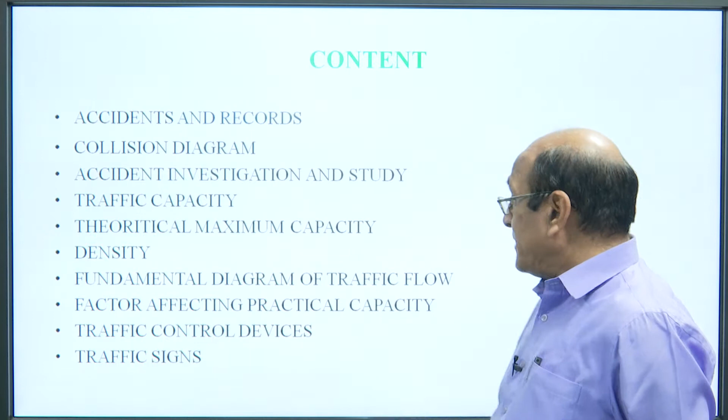Today's contents are accident and records, collision diagram, accident investigation and study, traffic capacity, theoretical maximum capacity, density, fundamental diagram of traffic flow, factors affecting practical capacity, traffic control devices, traffic signs.

In accident and records, collection of accident data is essential, in which first of all general data are collected. What is the date, what is the month, what is the weather in which the accident occurred. Next is location, what is the location of the area where the accident occurred.

Details of the vehicle involved, the vehicle which was involved in the accident, the details of which make, type of vehicles, this has to be collected. Nature of accident, whether it is a major accident, minor accident, or some fatality has occurred, or it is just injury.

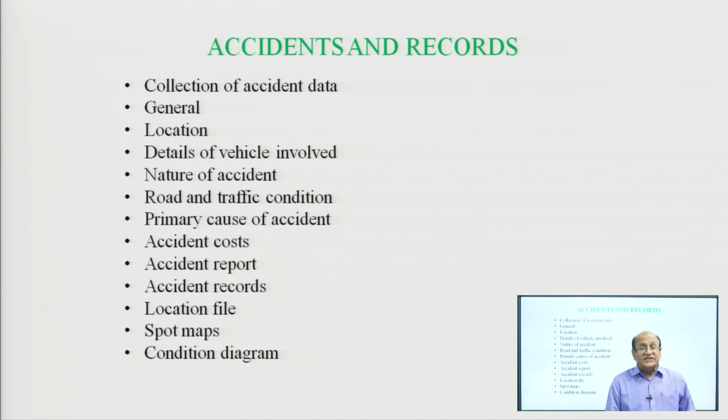Road and traffic conditions. Road conditions are also recorded. What are the road conditions, the riding quality, whether riding quality is okay or not. The traffic condition, whether the traffic is mixed traffic, channelized traffic, unchannelized traffic. Next is primary cause of accident. In the first instance, what is the cause of the accident.

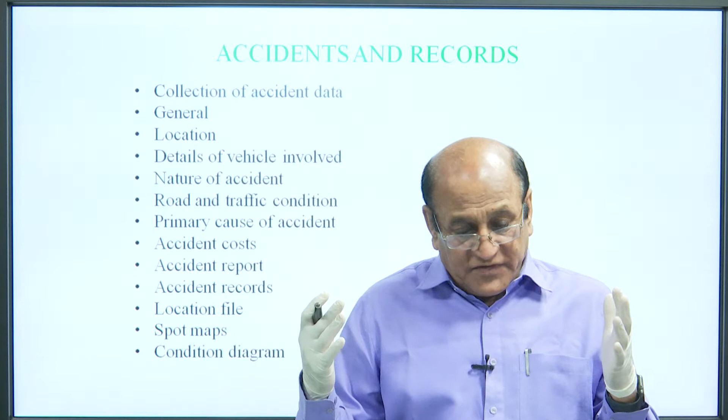Accident cost, what is the loss of property in this accident, this should be also counted. Accident report, the competent authority for the accident is police personnel. They have to work under the legal offence, so they should be informed. Accident records, these have to be collected by the civil personnel as well as the police personnel.

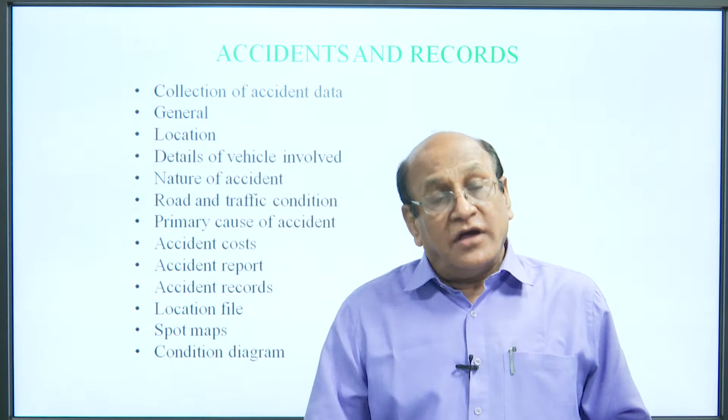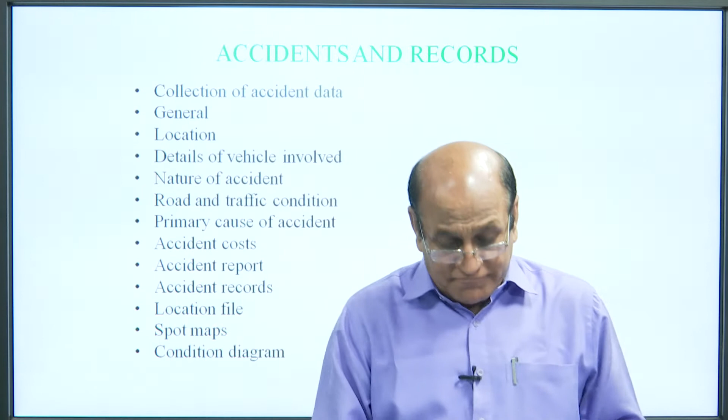Location file, what is the location of the accident? This should be mentioned in a file in a proper way. A spot map, that is called Nazri Naksha. This should be recorded into the record book. Condition diagram, what are the conditions of that day, that time of accident, that should be recorded.

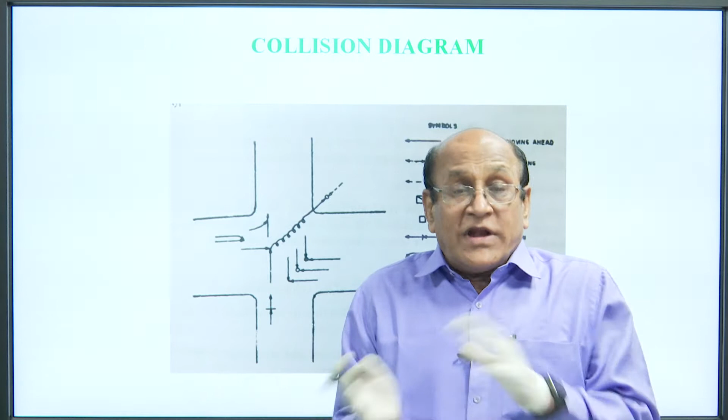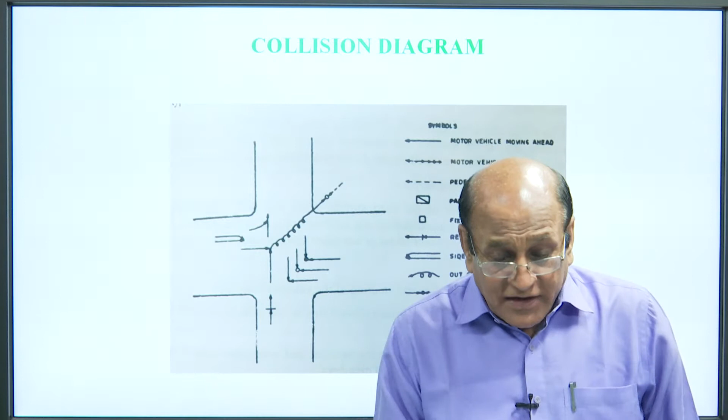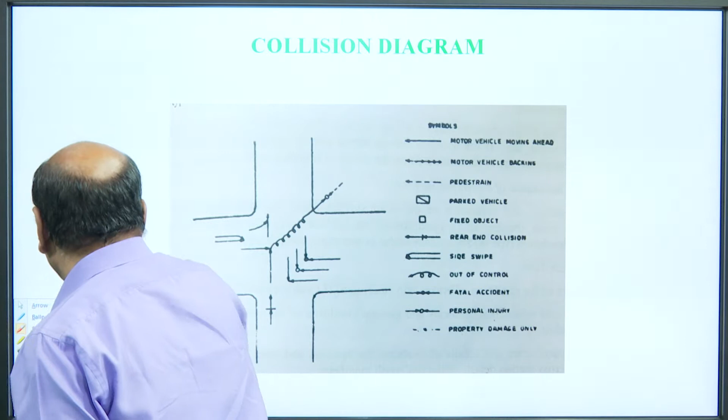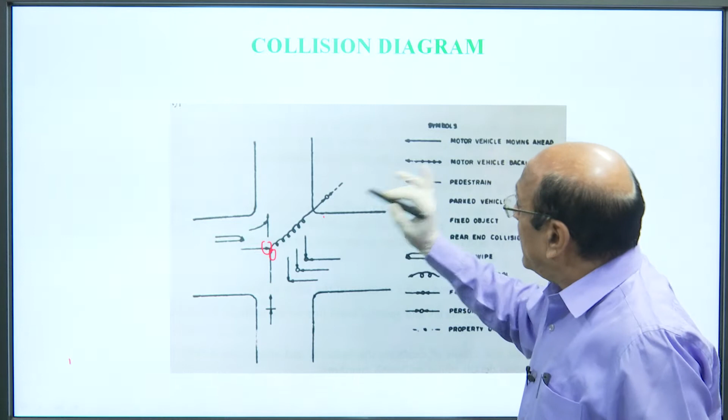This is the collision diagram, means when the vehicle and a pedestrian collide with each other, what is the position of the vehicle, what is the position of the pedestrian. This should be mentioned in a diagram. Suppose this is the vehicle and this fellow is a pedestrian. Both vehicle and the pedestrian have collided at this spot. So, this should be represented in the diagram.

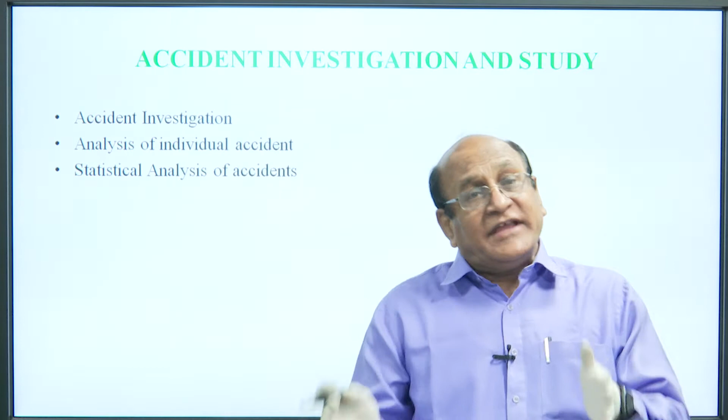Accident investigation and study. This has to be carried out after the accident. Accident investigation could be carried out by the police personnel, tests could be carried out on the vehicles, the persons and more, and each individual accident is analyzed so that it could be compared with other accidents, whether the point of accident is causing accidents or something else. A statistical analysis of accidents should be kept in traffic engineering for future works.

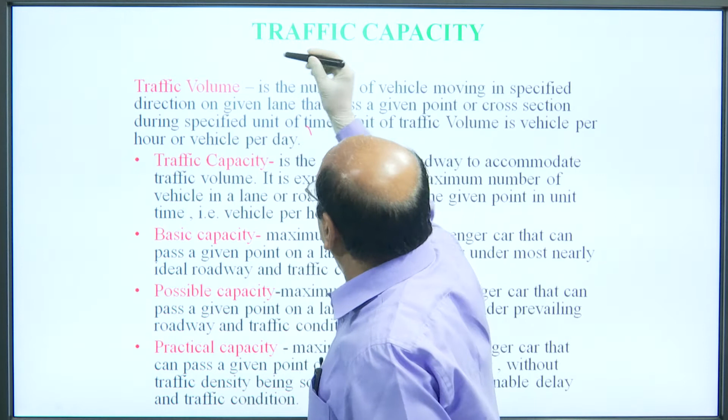Now, come to traffic volume, traffic capacity. First of all, in traffic capacity, the word coming is traffic volume. Traffic volume is the number of vehicles moving in a specified direction on a given lane that pass a given point or cross section during a specified time. Unit of traffic volume is vehicles per hour or vehicles per day. So, this is the traffic volume.

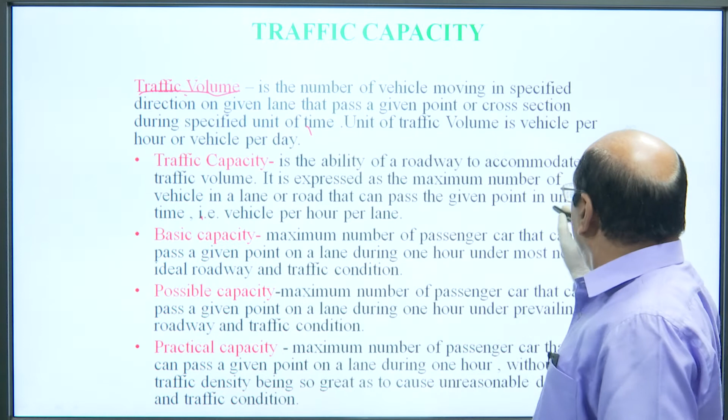Now, traffic capacity. Traffic capacity is defined as the ability of a roadway to accommodate traffic volume. It is expressed as the maximum number of vehicles in a lane or road that can pass the given point in a unit time. That is vehicles per hour per lane.

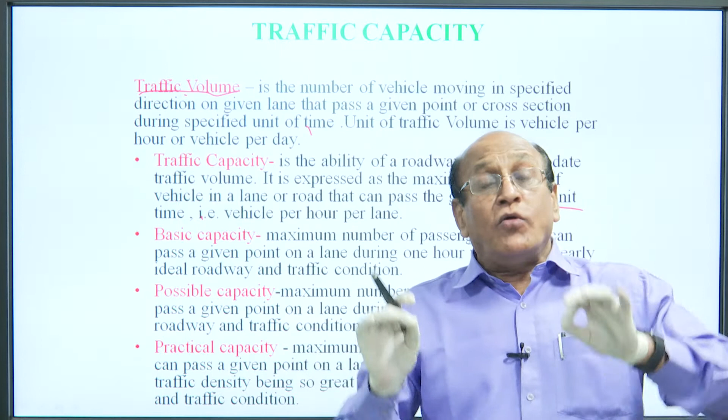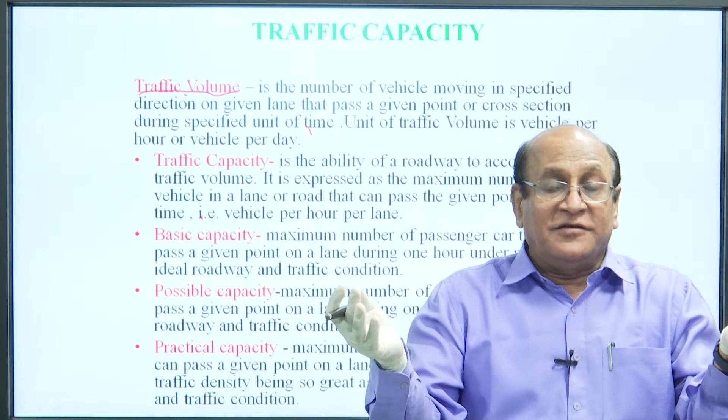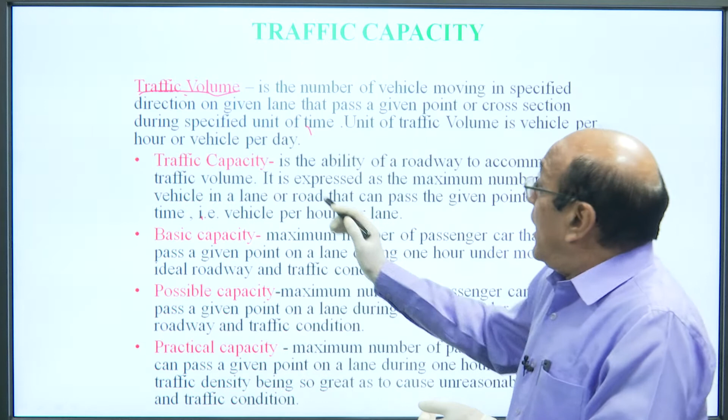See here, traffic volume is the number of vehicles passing through a point or cross section, and the traffic capacity is the maximum number, means after that the road has no capacity to accommodate any further traffic. This traffic volume may be lower than the traffic capacity.

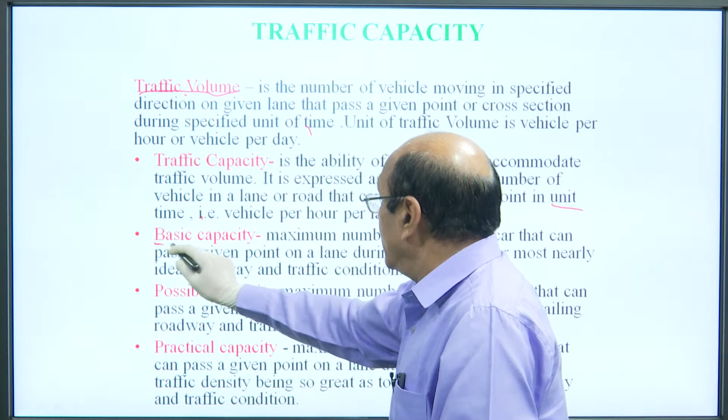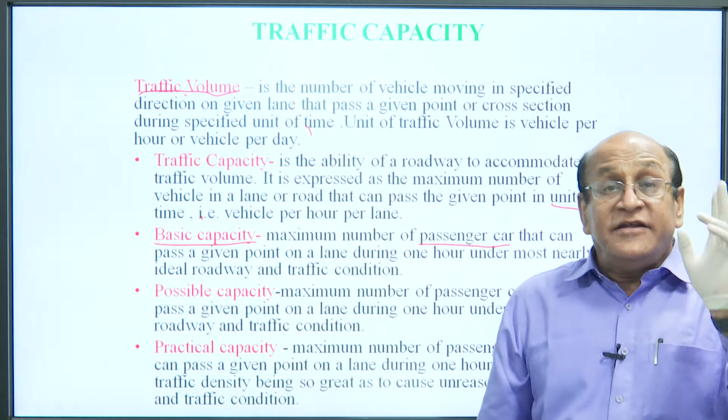Now, come to the basic capacity. Basic capacity, the maximum number of passenger cars. See here, here it is not written vehicle, here passenger car. The maximum number of passenger cars that can pass a given point on a lane during 1 hour under the most nearly ideal roadway and traffic conditions. So, the basic capacity is the ideal capacity of a highway.

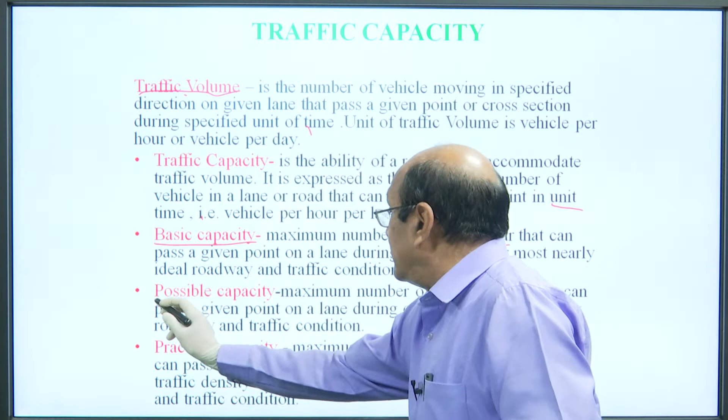Possible capacity, the maximum number of passenger cars that can pass a given point on a lane during 1 hour under the prevailing roadway and traffic conditions. So, this is the possible capacity.

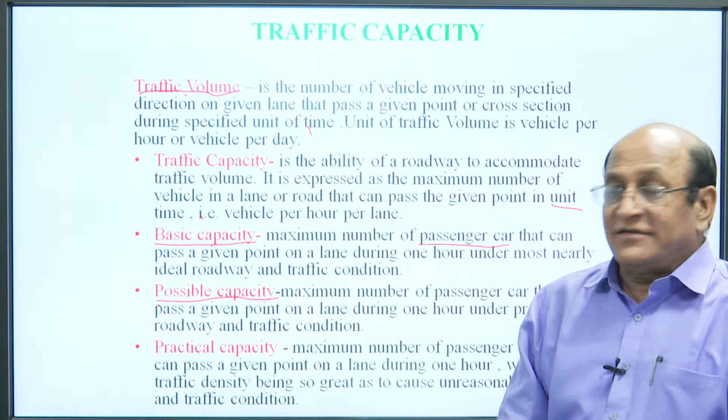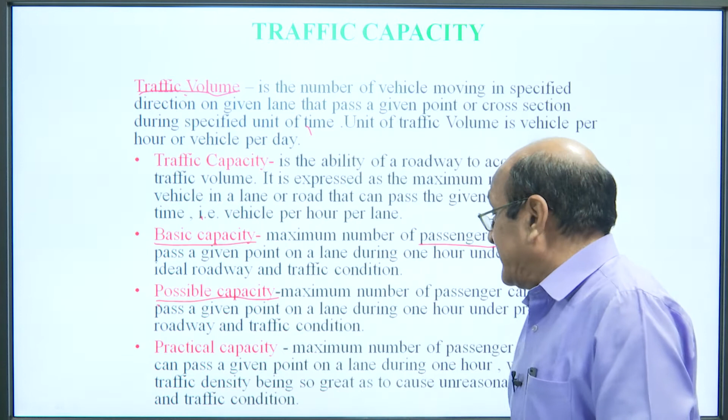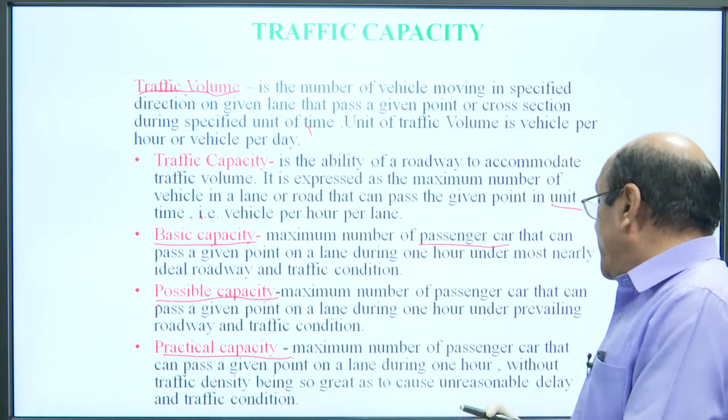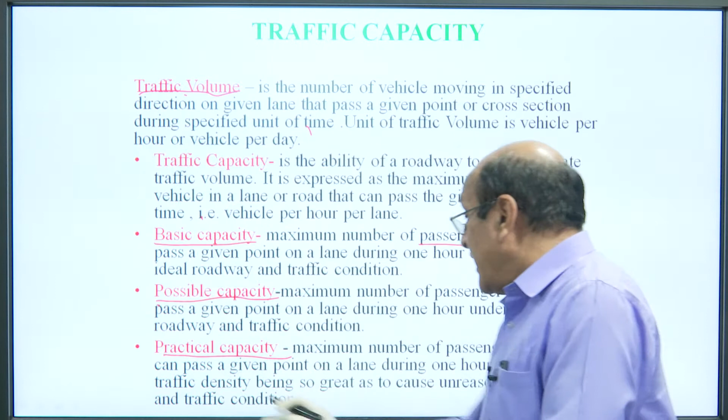Here you see, this is the possible capacity. Now, practical capacity: the maximum number of passenger cars that can pass a given point on a lane during 1 hour without traffic density being so great as to cause unreasonable delay and traffic conditions. So, these are the basic parameters as far as traffic capacity is concerned.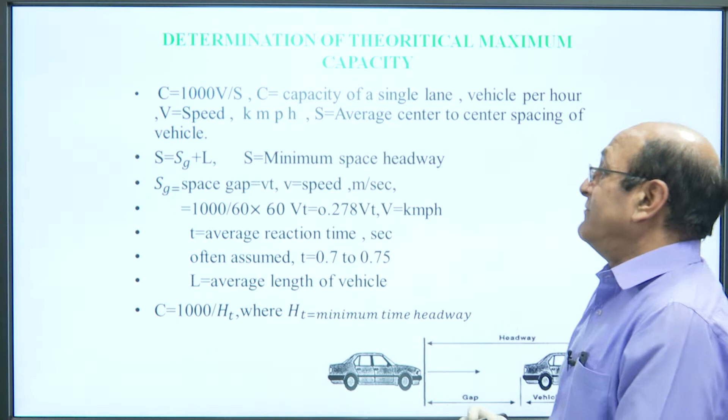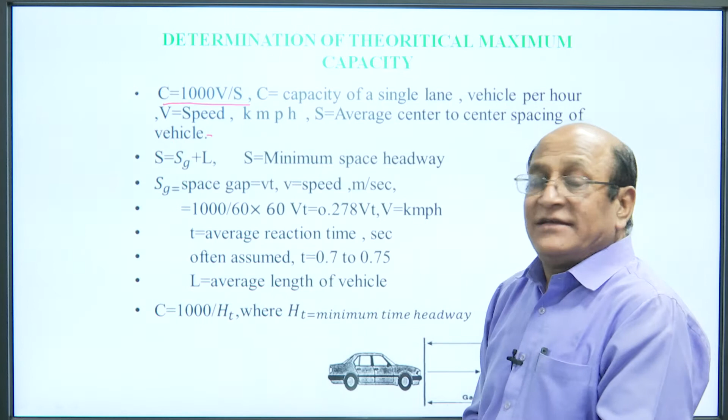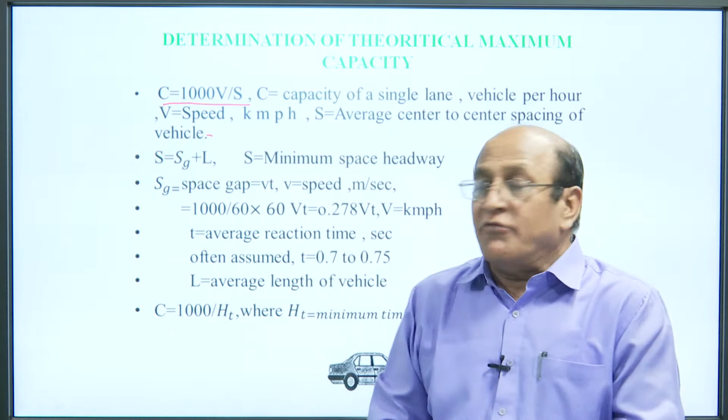Now, come to determination of the theoretical maximum capacity. That could be found out by C = 1000V/S, where C is the capacity of a single lane in vehicles per hour, V is the speed in kilometers per hour, and S is the average center to center spacing of the vehicles.

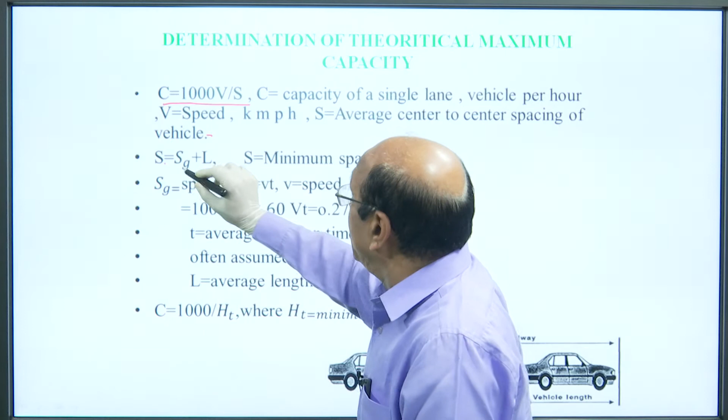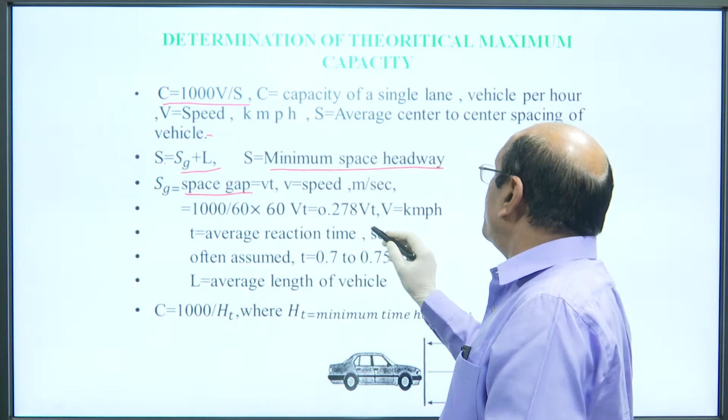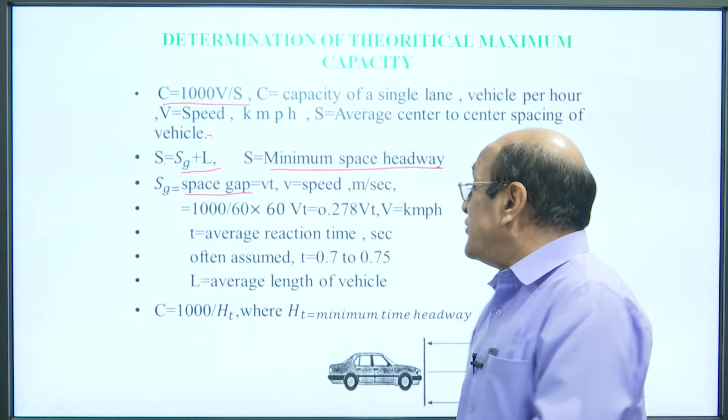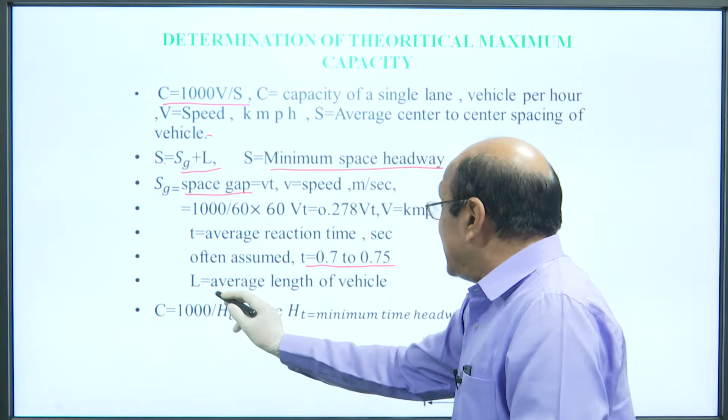So, here S = Sg + L. S is the minimum space headway, Sg is the space gap, and that is Vt. V is the speed in meters per second, means speed of the vehicle. So, this could be written as 1000 divided by 60 into 60 Vt. So, it will be 0.278 Vt, where V is in kilometers per hour. t is the average reaction time in seconds. Often it is assumed to be t between 0.7 to 0.75, depending on the age group of the person. L is the average length of the vehicle.

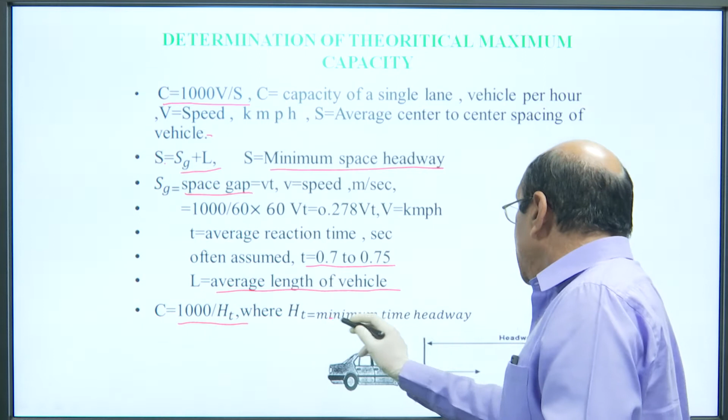So, C will be 1000/Ht, where Ht is the minimum time headway; here there was a space headway. So, see here, this is one vehicle, ahead this is another vehicle, this is the length of the vehicle, and between these two vehicles there is a gap, and this gap is Sg. So, S will be equal to Sg + L. L is the length of the vehicle.

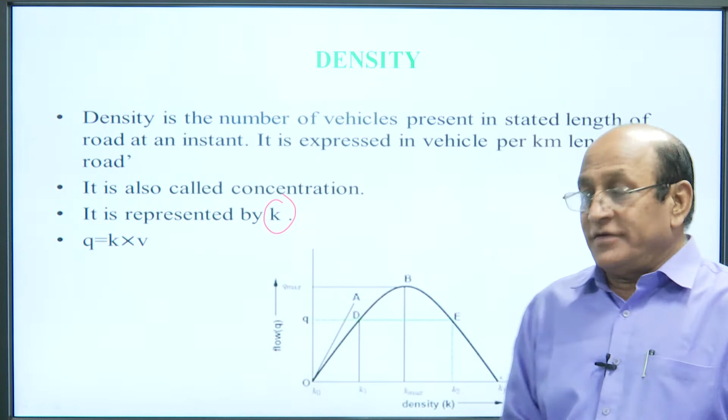Now, density. Density is the number of vehicles present in a stated length of road at an instant. It is expressed in vehicles per kilometer length of road. It is also called concentration. It is represented by K. So, this is the diagram between the flow and density, and this flow and density diagram is parabolic. So, see here, this is the flow and this is the density. Density means concentration.

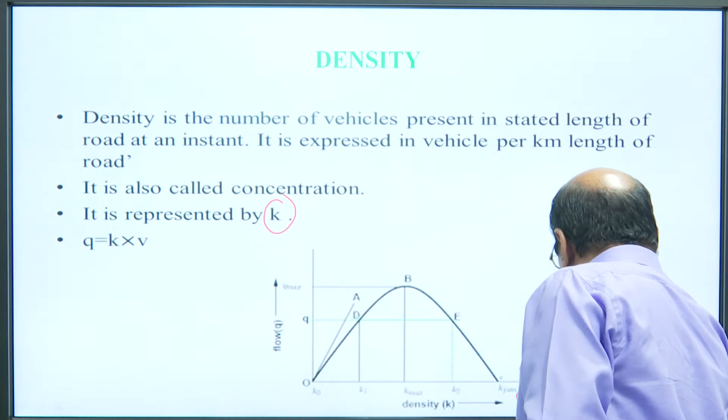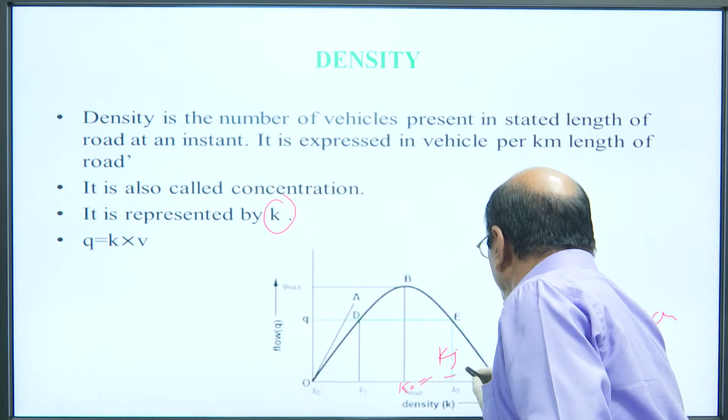When there is a jam, this is the maximum concentration. So, it is called jamming concentration. This is the K0, where this will be equal to Kj by 2. The fundamental diagram of traffic flow. So, it is also called QK curve, where the flow concentration relationship is parabolic. Parabolic means y = ax².

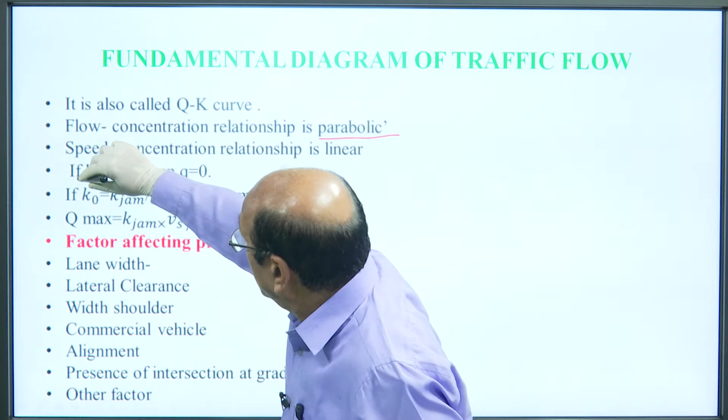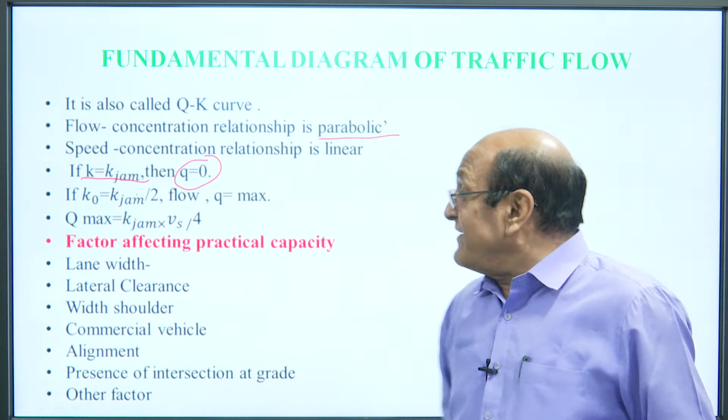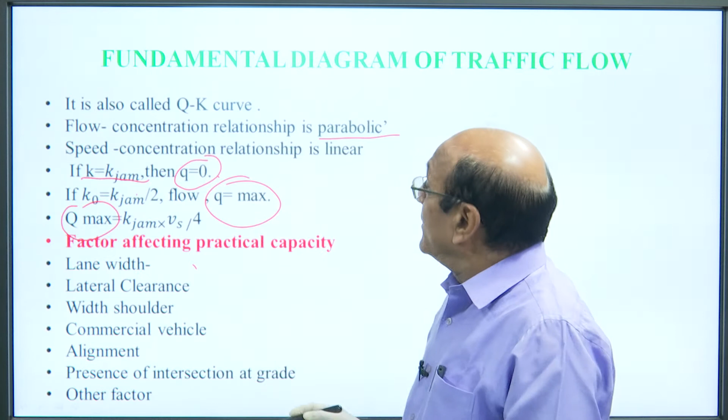If K is equal to K jam, then Q will be 0. If the concentration is maximum, means jamming concentration, there is no movement of vehicles at all on the highway; in that case Q will be 0. If K0 is equal to K jam divided by 2, flow Q will be the maximum. So, Q maximum will be equal to K jam into Vs, means free flow speed, divided by 4. So, that will give the maximum flow at those conditions.

Factors affecting practical capacity: lane width. If the lane width is reduced from 3.5 to 3, then the capacity is reduced to 76%. Likewise, lateral clearance: if lateral clearance from the edge of the road is 1.8 meters, then there will be no effect at all. But if the lateral clearance is less than 1.8 meters, in that condition, that will affect the capacity of the highways.

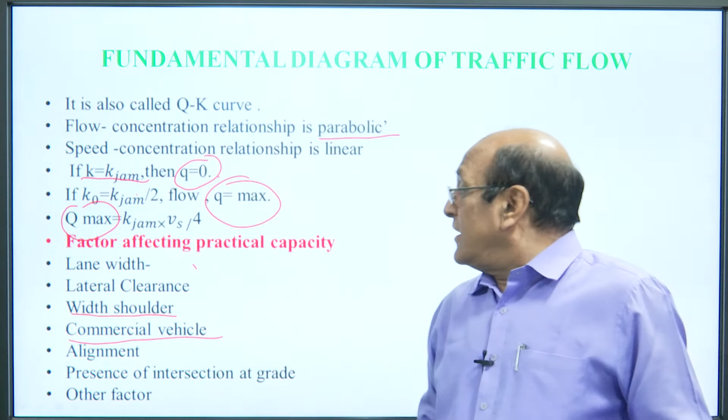Width of the shoulder. If the width of the shoulder is proper, then the capacity will increase automatically. This is the psychological factor. When a driver is driving a vehicle, he can pull his vehicle to the edge of the carriageway, because he knows that there is a proper shoulder. So, the capacity of the road will automatically increase. Commercial vehicles: the speed and movement of commercial vehicles is such that it affects the practical capacity.

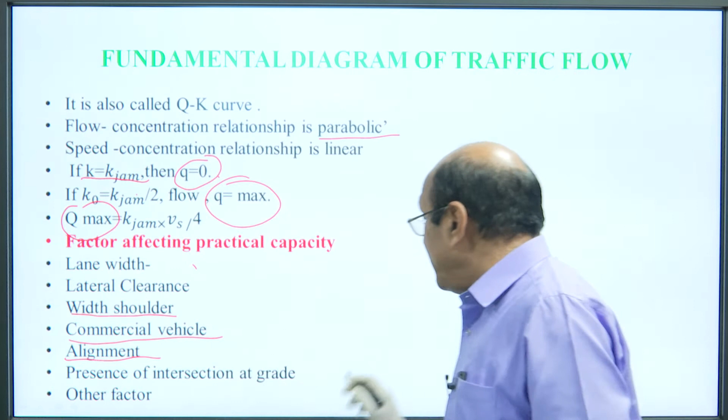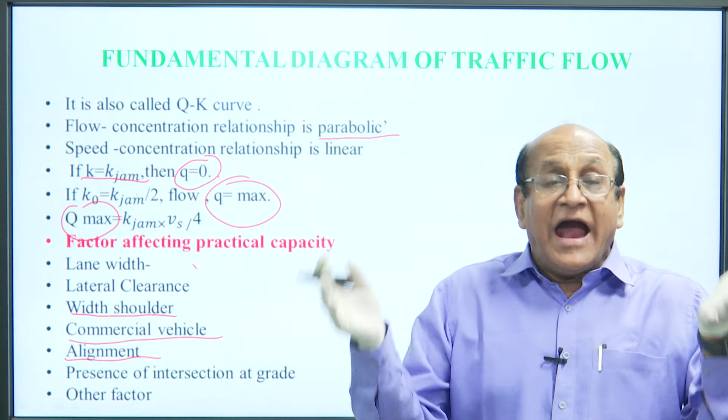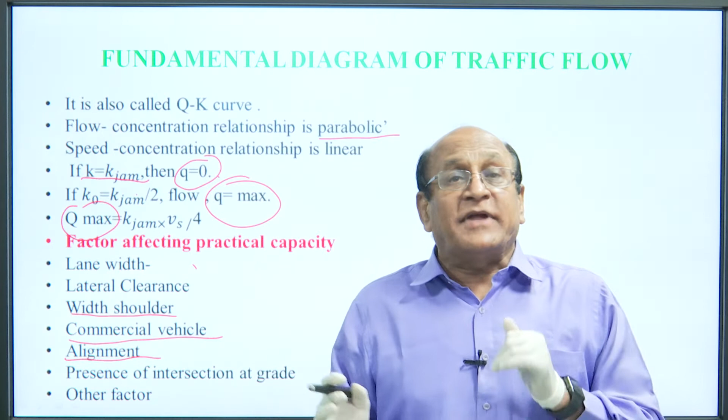Alignment: if the alignment is straight, then the capacity will increase. If the alignment is, say, in a curve, then automatically the speed of the vehicles coming on that highway will decrease, and finally decrease the capacity. The presence of intersections at grade: if there is an intersection at grade, of course, psychologically and physically the speed of the vehicle will reduce. Just see whether there is a passage for the vehicle at that cross section or not. So, this will also affect the practical capacity. Other factors, like climatic conditions, also affect the practical capacity of the highway.

Now, come to the traffic control devices. These are used to control, regulate and guide the traffic. This is a very useful part of the highway. These are categorized under signs, signals, markings, and islands. Traffic signs are used to regulate traffic by imparting messages to the driver about their need. This should be backed by law in order to make them useful and effective.

This is the provision in the Motor Vehicle Act. If there is any violation, then that will be a legal offence and action could be taken by the police personnel if anyone is violating the law.

Then the principle: traffic signs are to be installed only by the authority of law, with proper enforcement measures, and to be put up only after sufficient traffic study. Traffic study is a must before you put up any type of sign. Excessive use of signs should be avoided. Otherwise, the driver will only see the signs and the mind of the driver will divert from driving to looking at the boards. So, that should be avoided.

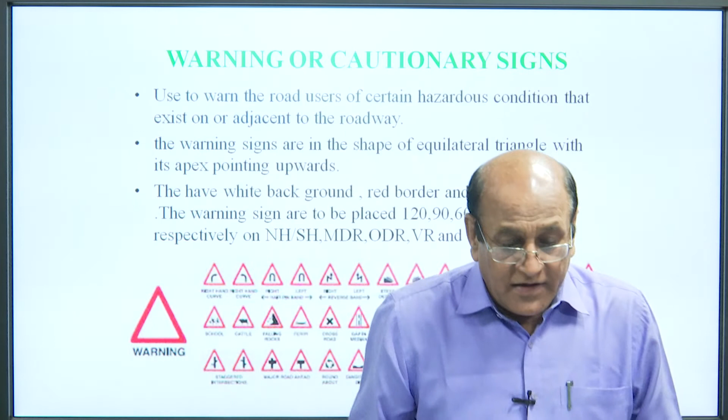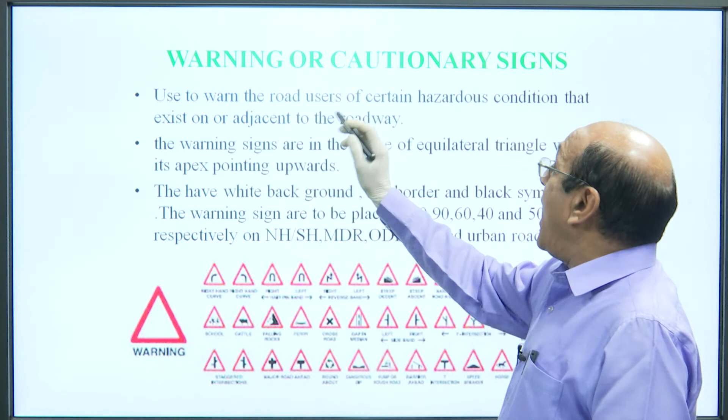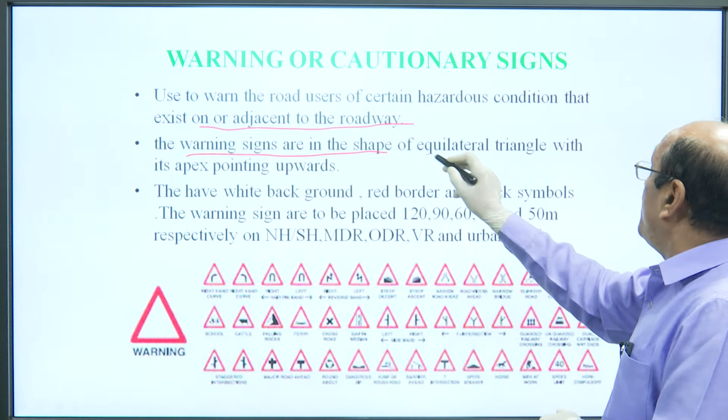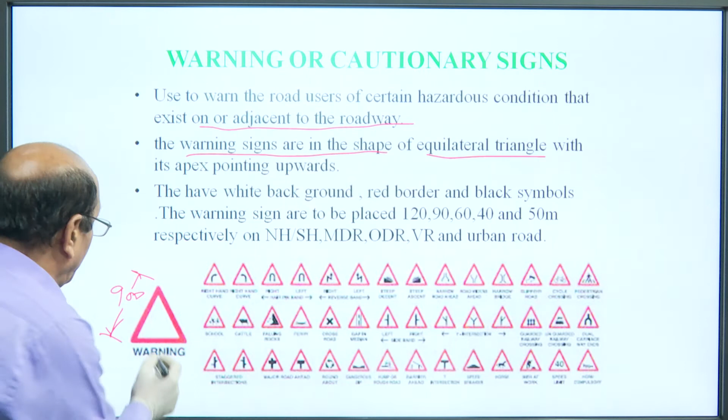Now, the warning or cautionary sign. This is used to warn the road user of certain hazardous conditions that exist on or adjacent to the road. Warning signs are in the shape of an equilateral triangle. Here is the signage. This is 900, painted white with a red border. They have a white background, red border and black symbol.

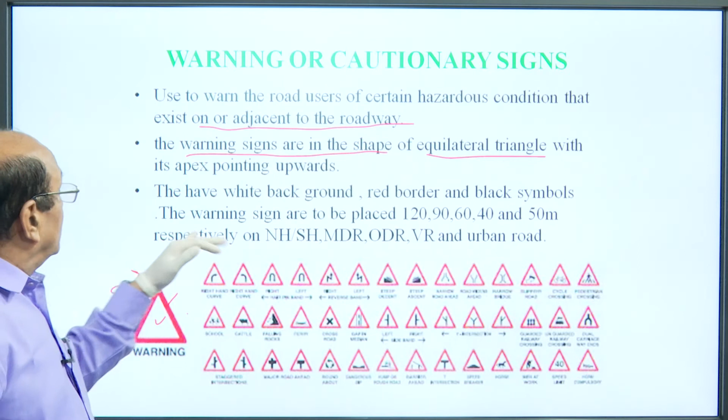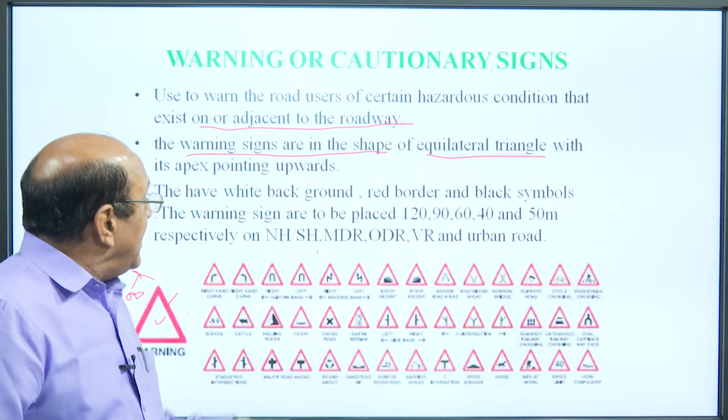The warning signs are to be placed 120 meter, 90 meter, 60 meter, 40 meter and 50 meter respectively on national highway, state highway, MDR, ODR, village road and urban road.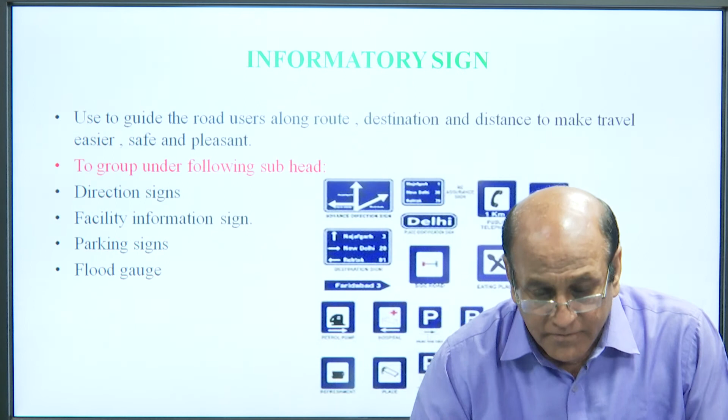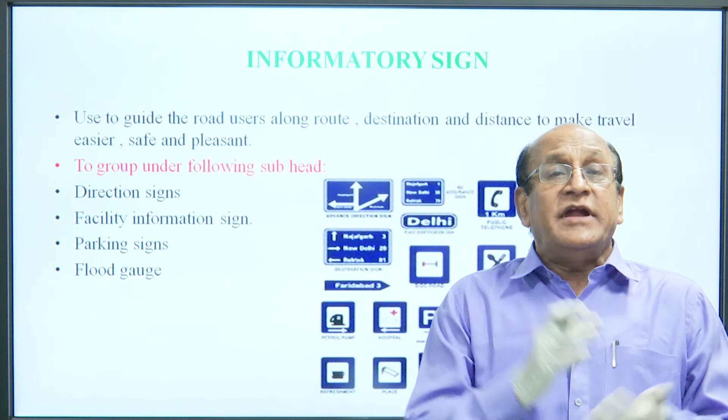Now, come to the informatory signboard. The informatory signboard is used to guide the road user along the route, destination and distance to make travel easier, safe and pleasant. Nowadays, roads are constructed with very high specifications. Speeds of vehicles are even beyond 100 km per hour. The riding quality of the highway is very good. So, the authority is now providing different utilities along the highway, so that it can be easily known to the driver or passenger that these facilities are available, say 10 kilometers, 20 kilometers, 100 meters or 200 meters ahead.

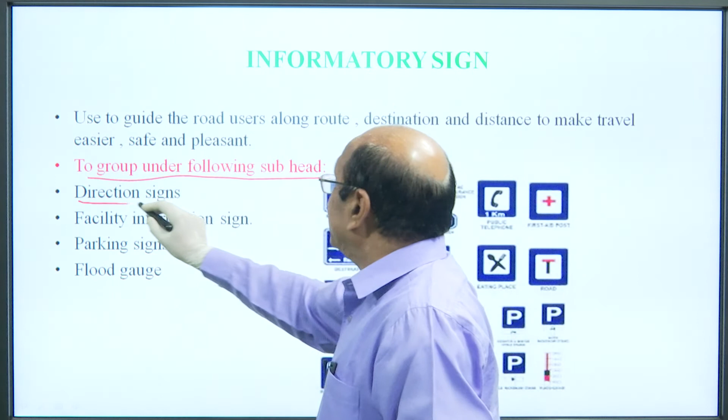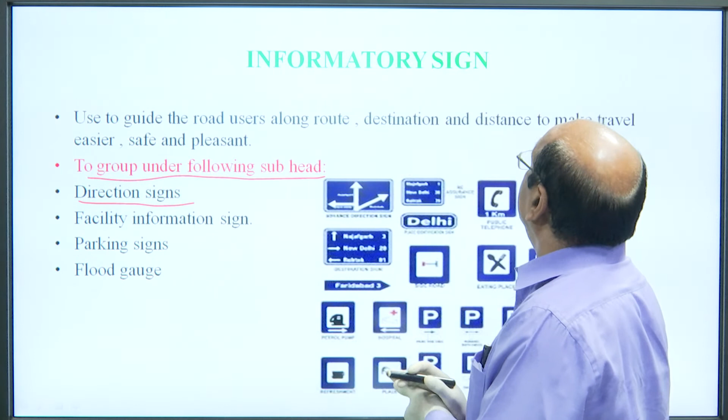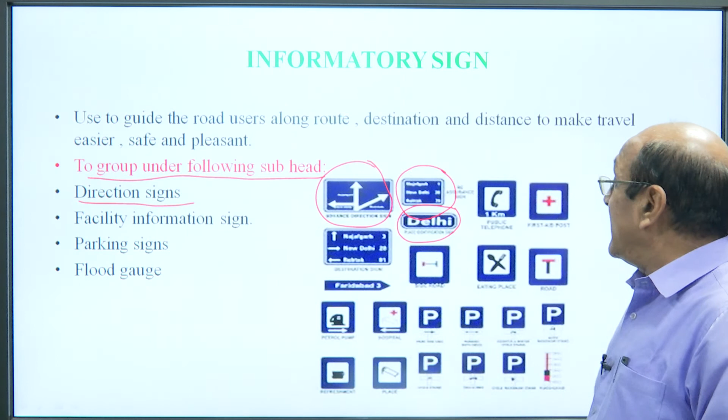These are grouped under the following subheads; one is the direction sign. When we go anywhere and there is no direction, we wonder why no direction signboard is placed here, what is the direction, where I have to go. With it there are no such problems. So, the direction signboard is an informatory sign placed along the highway. Say this is the informatory signboard, this is, say, Delhi. This is the direction sign: this place is located from here at such a distance.

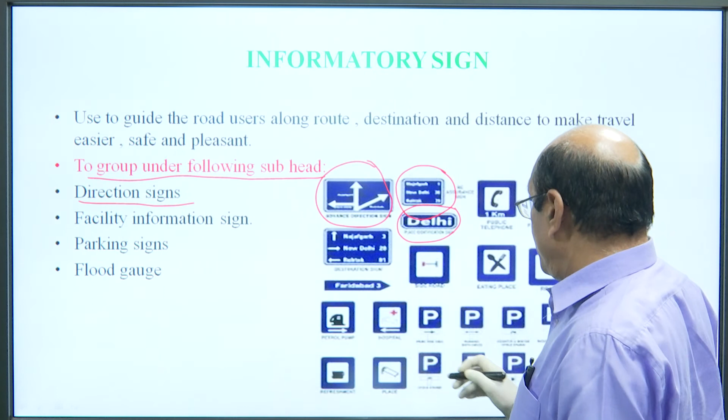One thing is important: if you are going somewhere and you have no directions and your mobile is off, then how will you call anyone for help? So, there should be a telephone sign, so that one can at least inform the nearest person that this thing has happened on this road and the location is such and such.

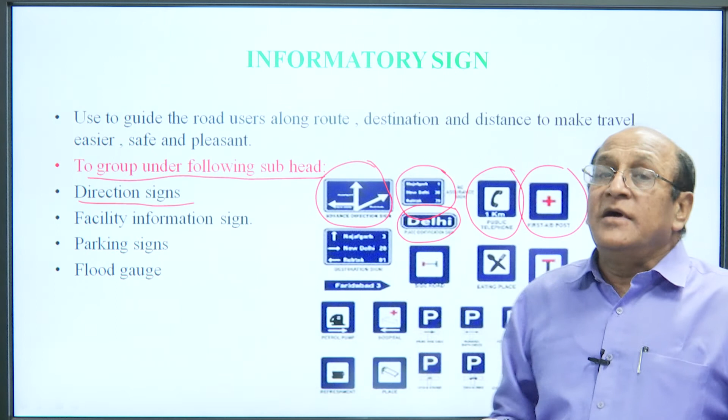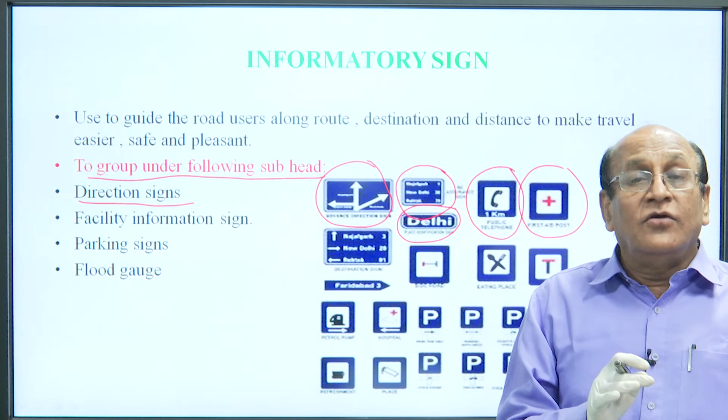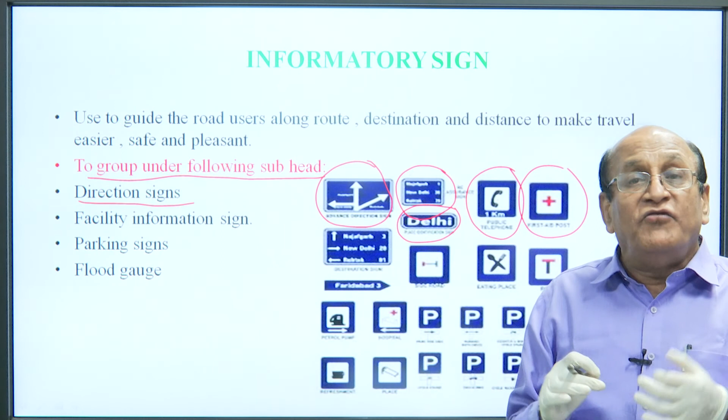Say something happened, somebody has a medical problem, not only an accident but other causes which need a hospital or first aid; then there should be some sign which will help the passenger know that at such a distance there is a hospital or first aid station where he will get the help which is highly needed at that time.

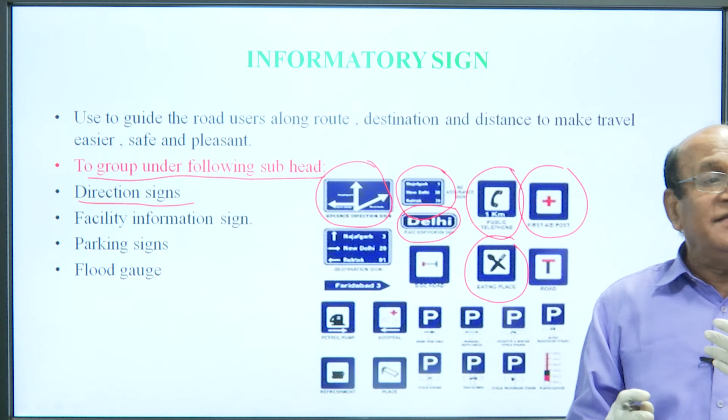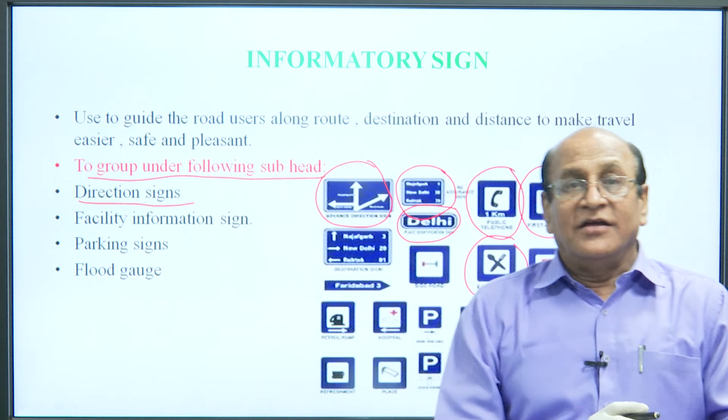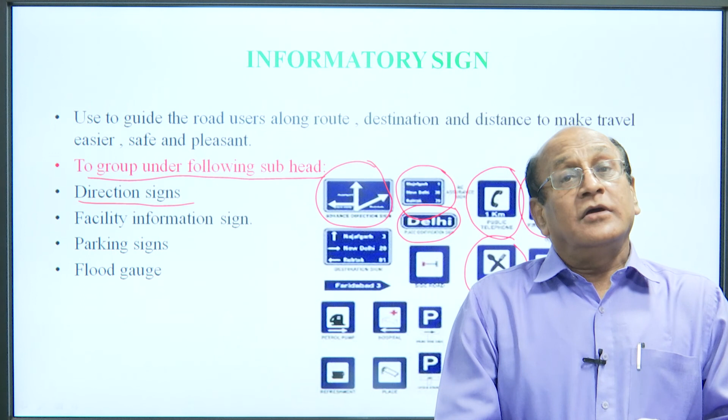Say if there is this sign, then anyone can take refreshment. So, these are the informatory signs which are placed along the roads, so that drivers and road users can know the facilities available on the road.